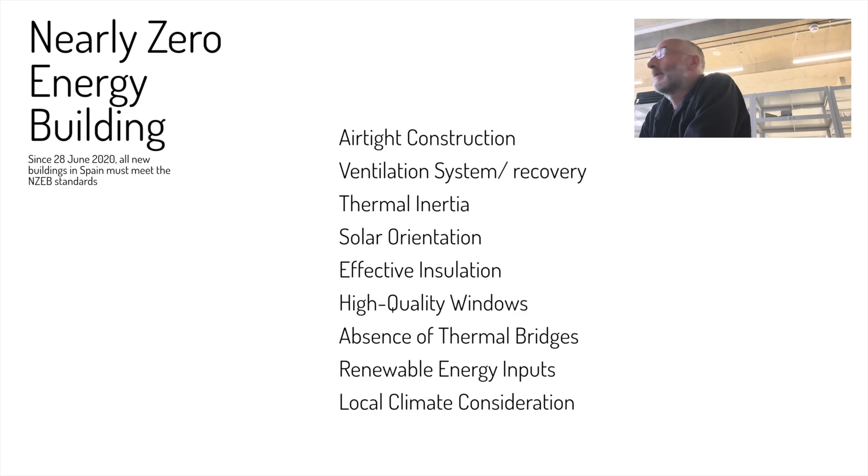So add to that, because of the climate crisis, because of the European Union membership, buildings in Spain since June 2020 have to be nearly zero energy buildings. This is broadly like the German passive house standard. We're talking about, I'll read them out: airtight construction, mechanical heat ventilation recovery, high levels of thermal inertia - we'll come to that - solar orientation, the opposite of ours where they don't want the sun, effective insulation, high quality windows, absence of thermal bridges, renewable energy inputs, local climate consideration.

If we look at Mallorca, this is the Spanish regulations. My red pointer doesn't work because it's a TV, but you can see London on the end there. Mallorca's broadly the same as Valencia. It's a category B climate, so these are the regulations for thermal conductivity and so on.

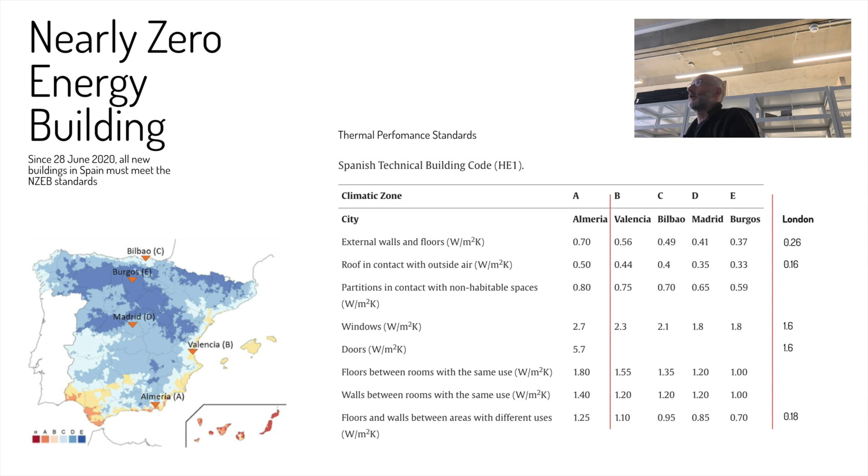But the regulations are probably sensible for the climate that they have there. And into this comes IBAVI, the Balearic Social Housing Institute, styled IBAVI, which has been building and operating low-cost housing in the Balearic Islands since 1986. Around 1,800 rental apartments already exist, and 900 more are now being built.

For most of its buildings, IBAVI commissions independent architectural firms such as H Arquitectes, TEd'A, Peris and Toral, Data AE, López Rivera. And IBAVI's in-house architectural team also design buildings. In all these cases, they pay full fees. IBAVI's projects begin with a technique of resource mapping, which allows them to discover all available local resources, whether tangible or not.

They're also the only social housing provider, apart from perhaps the likes of Camden architects and LCC architects, that gets an El Croquis about them - issue 219. They benefited from applying for and successfully winning a European grant to do research into sustainability. It's not normally given to housing projects, but they managed to make this proposal for the Life Reusing Posidonia project.

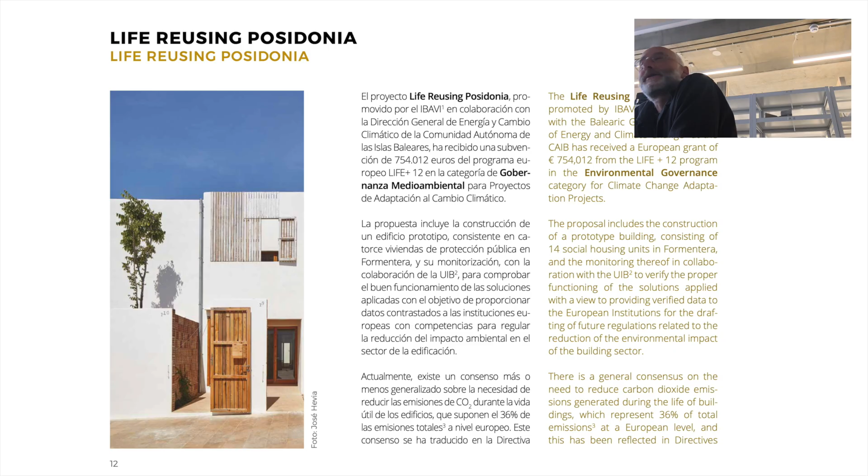They got 754,000 euros from the LIFE programme, and used it to build 14 social housing units on Formentera. They developed this catalogue of research, a 144-page document. I've just selected a few pages to give you an idea, but it's downloadable from a website.

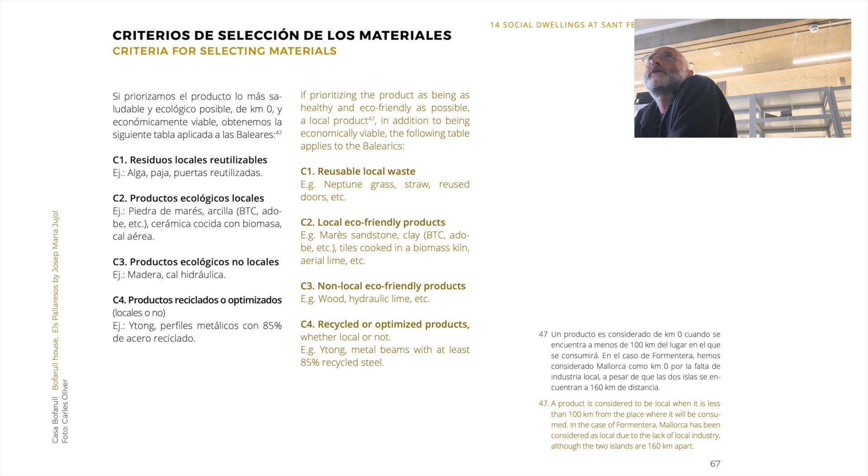Category C2s are local eco-friendly materials. That's the best - there's no transport costs, and the materials are doing their job. They considered local to be within 100 kilometres, but because Formentera is a small island quite far into the Mediterranean, they allowed Mallorca to count as local for them.

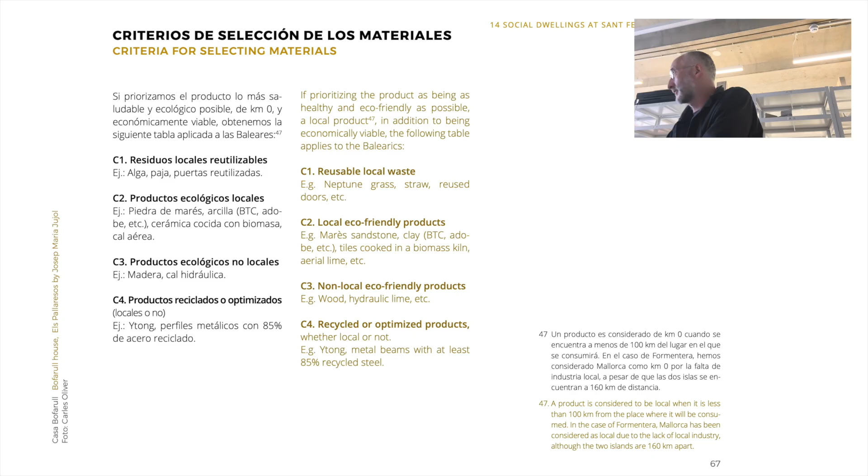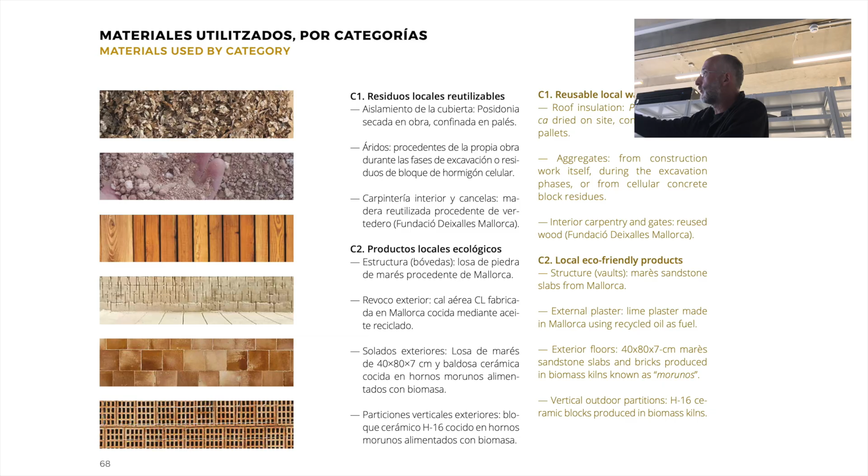The best things are reusable local waste - we'll come on to that - and eco-friendly products. We're moving away from what we want to what we have to have, for non-local eco-friendly products, and then recycled and optimized products. At this point, the Ytong cellular concrete blocks are an example.

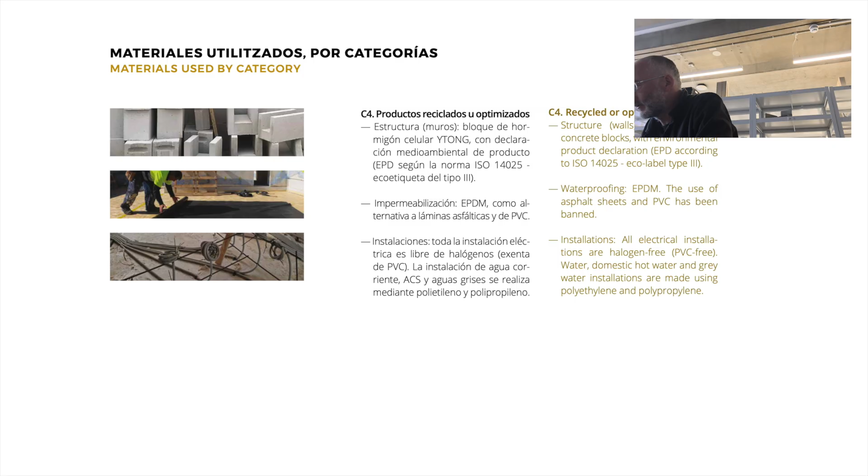The key thing about the IBAVI approach is not just to build social housing - these cannot be sold, there's no right to buy. No one can take these off the state. They're owned by the state.

If you have enough salary to rent somewhere, you can go and rent somewhere. These are for people who need these spaces and would otherwise not have accommodation - they'd have to live in small rooms with their parents, or pay an extortionate market rate because they're competing with the Germans who own all the property on Mallorca.

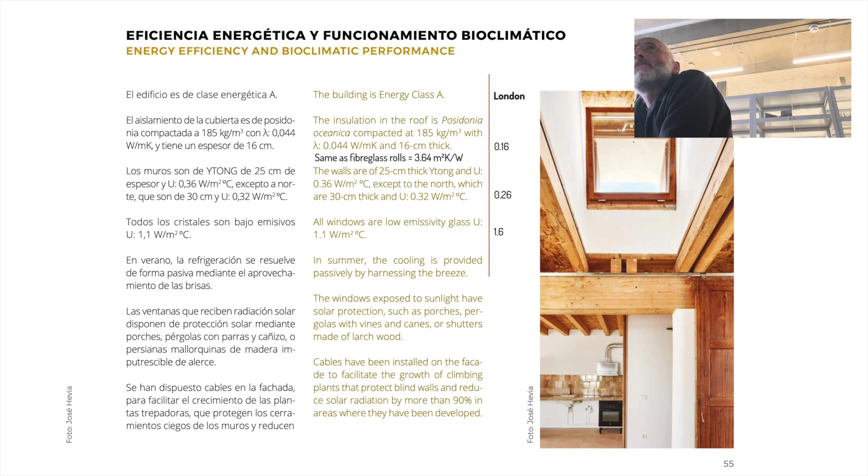And the thing that they've done is they've gone back and measured. They know the data, and they know what does work and what doesn't work in their theory.

Take one of these materials, Posidonia oceanica, or Neptune grass. This is an undersea saltwater plant which washes up when dead on beaches like this. Due to its chemical composition and content of phenolic compounds, sulfides and sulfites, there's no terrestrial predator that can destroy it - no fungus, mushrooms, termites, nothing.

So it's there, it's ugly, the tourists don't want it on the beach. So what they do is gather it up, dry it, and use it as roof insulation. And it's not limited to Mallorca - here's a map of the Mediterranean, and in blue are the places where Posidonia washes up on the beaches.

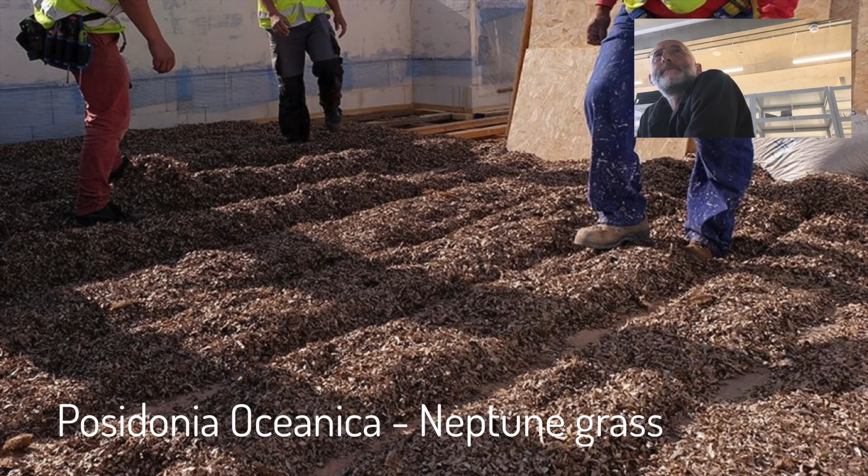Here they are installing it. It's been sun-dried, and then there's a timber frame, and the guys on site are hand-tamping it down to form the insulation. As I said before, thermal capacity is broadly similar to fiberglass mat, which is pretty good.

Another material, Mares - now you've probably seen this before. This is a seafront quarry of this sandstone, which is about 50% of the underlying geology of Mallorca.

Then another local sandstone, Santanyí, with a tighter texture, used for slightly waterproof surfaces like kitchen worktops and some interior walls. The main roof construction is vaulted tiles, again locally made, and all woodwork is Madeira Norte, Mallorcan pine. IBAVI described this building as their university.

There isn't an architecture school on Mallorca, but they do have this Jornotsen house. I was lucky enough to arrange a student field trip to see the works of IBAVI and try to understand their ways of working. The guy in the hat - I think because he's thin of hair - is Carlos, the chief architect, main researcher, and a very persuasive speaker on this subject.

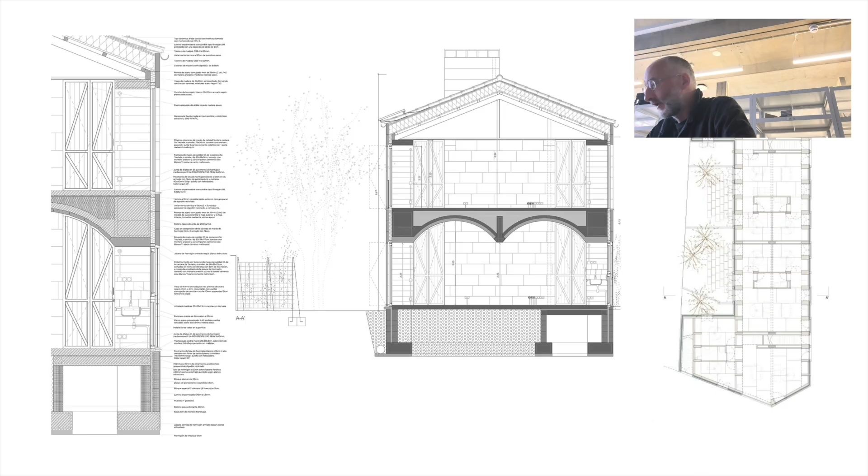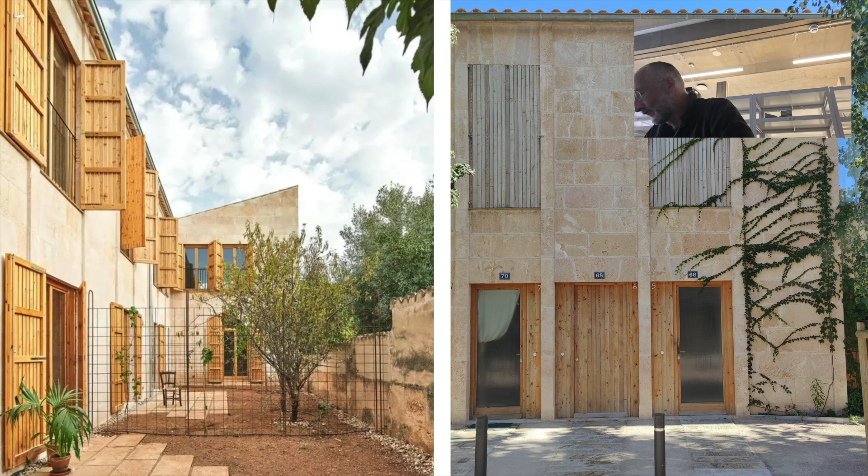The solar shading, we're not really allowed to do this here, but the solar shading is vegetation, and they use reclaimed timber for the shutters. The idea is that in the Mediterranean communal spaces, you sit outside in a summer's evening on a rocking chair and talk to people rather than inside sweating.

We went around the site, and not in this but in the one next door, which I'm about to come to, I saw an air conditioning unit, and Carlos told me that they're not allowed air conditioning units, and their contract can be terminated for having them, so he'd sort that out.

They went on and built the 19 dwelling unit alongside. The railway line's at the top, the very small main road at the middle, and then the kind of small space—you can't call it a town square—but it has that kind of function between the buildings.

Unlike the 8 metre span of the first phase, there's a 13.5 metre depth here. The floors therefore span from the party wall to the party wall. You can see the walls going across the plan, so they're short span timber floors between them. That frees up the facade to be just solar shading.

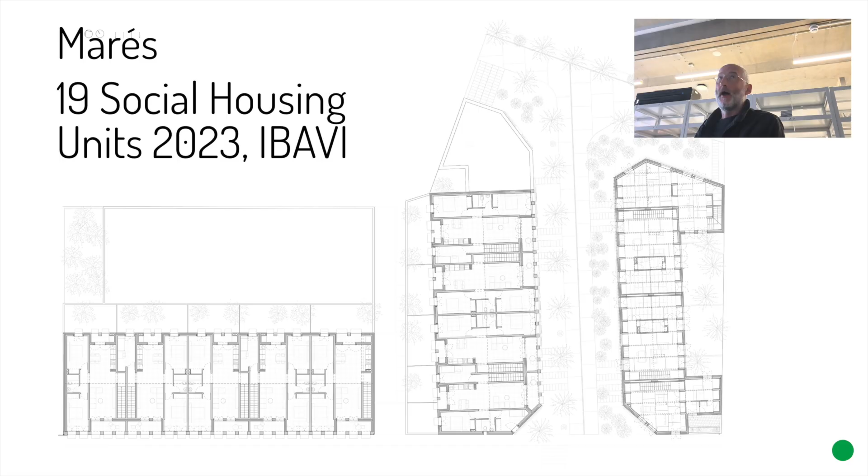They use a sloping roof system based on the Menorcan system. On the right, they use the Majorcan system because the massive weight sits on the walls and that pins down the thrust of the arches on the ground floor. Here they use the Menorcan system, which comes from Catalonia and is much thinner. That's where I found the air conditioning unit, by the way.

There at the end, the apparent chimney, their ventilation extracts, and you can see the building in a very tight street achieves its solar shading through a deep facade. The details are what they are. They don't need to hide the fact it's roof tiles, they rather celebrate the fact it's roof tiles.

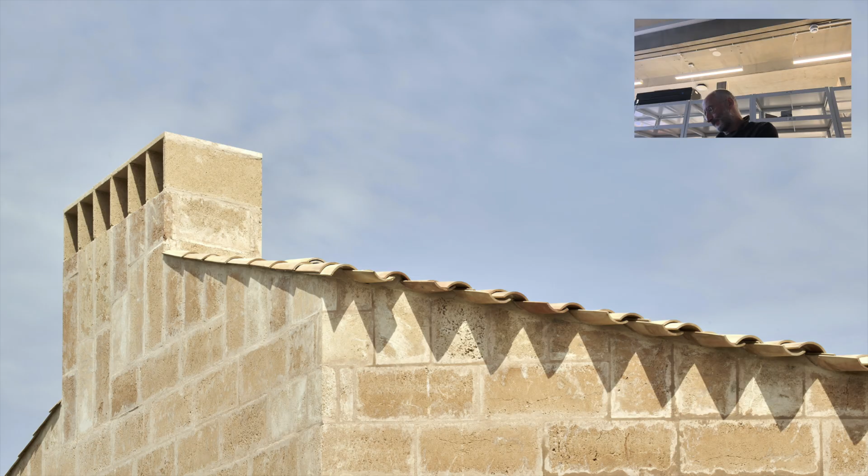This is a photo montage because the street's a bit narrow, so they use the pin cushioning. But there you can see that the open spaces have external and internal spaces and allow a variety of uses and dwellings between them. Here's the elevation.

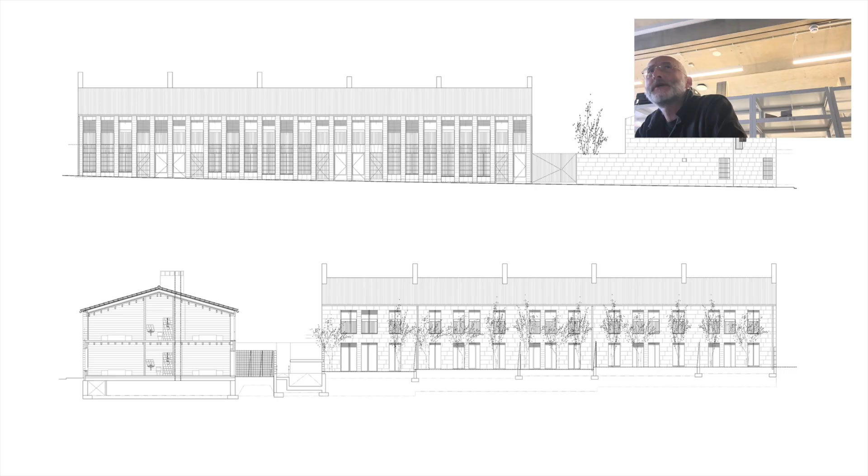At the back, it actually has a car park, and that's similar to a lot of other IBAVI projects because the local government regulations require they have parking, but no one actually gets a parking place, no one parks there, and the intention is to use it for a social function in the future or to build on it.

There's the details, as you can see, thinner construction than the first phase of the development, but obviously thick because of the slight inefficiency in insulation.

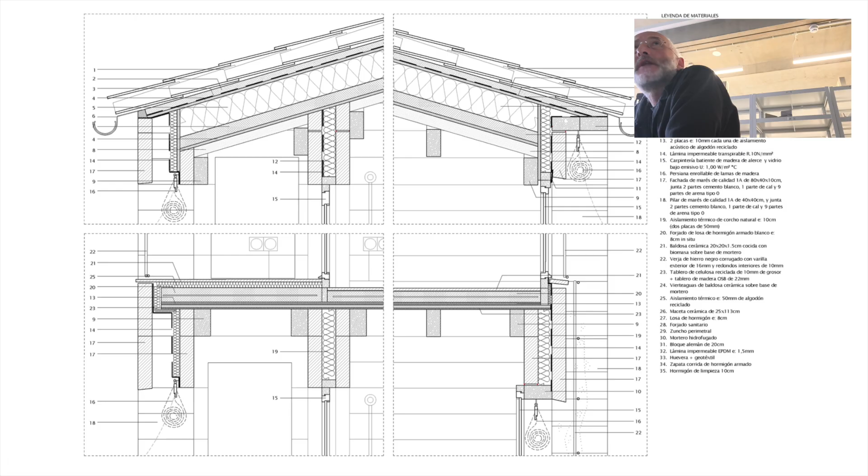Here on two other IBAVI projects, you can see the way that they're developing a consistent language of materials. They say we don't want to learn every new material. Once we've found something that's right, we want to stick with it.

The joinery liner is local pine, largely reused from reclaimed buildings. I asked why they use rebar for the balcony guardings. Apparently, it's better quality than the standard steel. It's pre-rusted, and it gives a grip for the solar shading to hang on, or you dry your clothes on for natural ventilation.

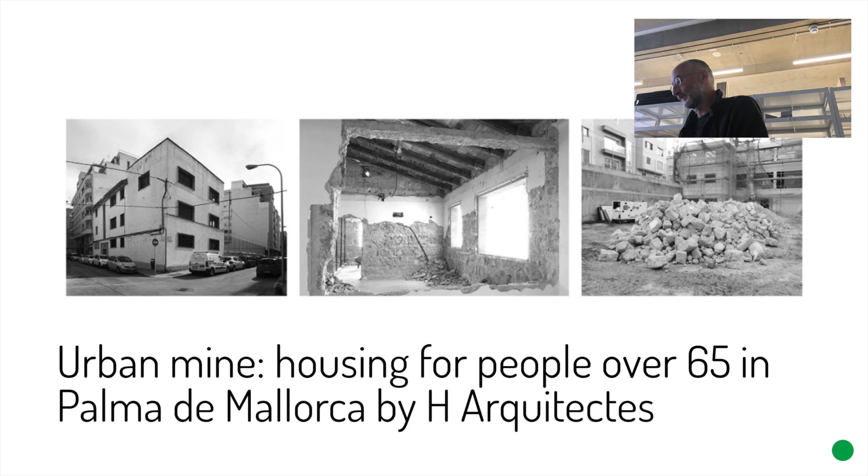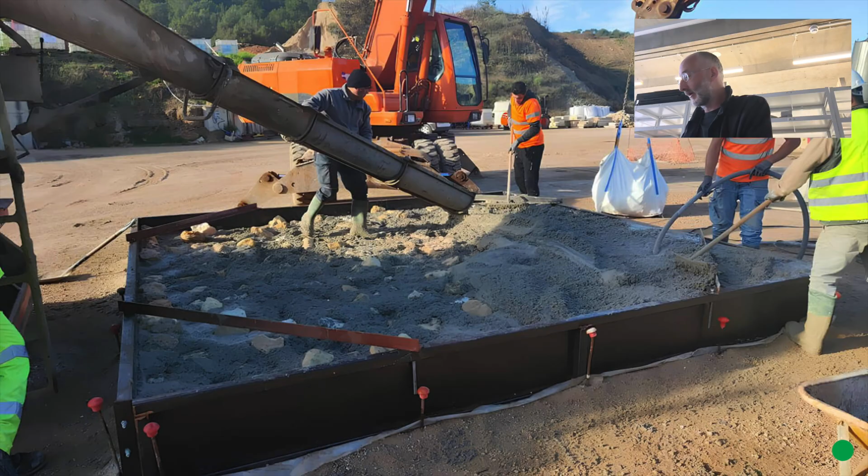Second, all the sandstone, about 160 cubic metres, was used to construct large blocks of cyclopean concrete with cement and lime mixed with recycled Marès stone, 40% of the block volume, composed of large cobbles up to 30 centimetres diameter, sandstone gravel, and Picadís sand, which is also made from the Marès local sandstone.

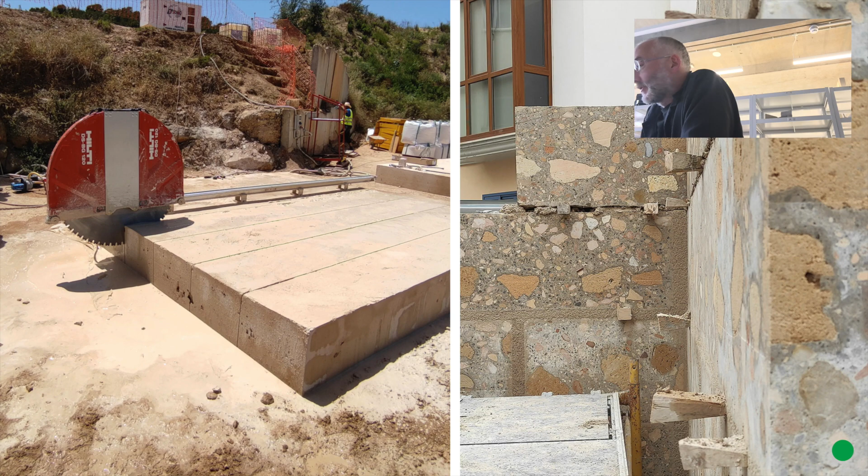Each block was cut with a large disc saw from a 4 by 4 metre slab, and the stones reappeared on the faces of the blocks. So they took the materials to a quarry and used the quarry system. There's a diesel generator that powers that saw, but that's it. That's the quarry, that's it.

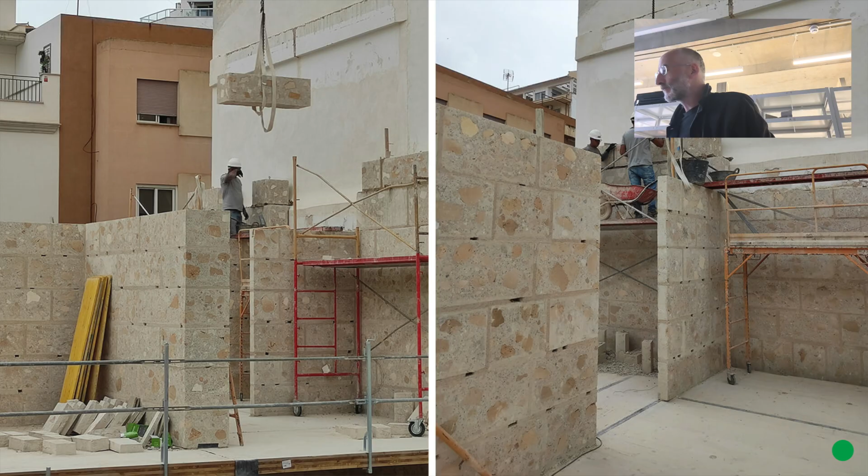Instead of making 3,000 different formers to make the blocks, they cut them into standard sizes and then subcut them to make all the walls in the project. The blocks of the top floor, being less load-bearing, are made of 100% lime concrete, while the rest of the floors combine lime with cement.

These blocks, approximately 135 centimetres long, 42 centimetres high, with variable widths for each floor—65, 54, 44 and 34 centimetres—were prefabricated once the demolition was completed, before commencing construction of the new building. This approach significantly reduced the construction duration.

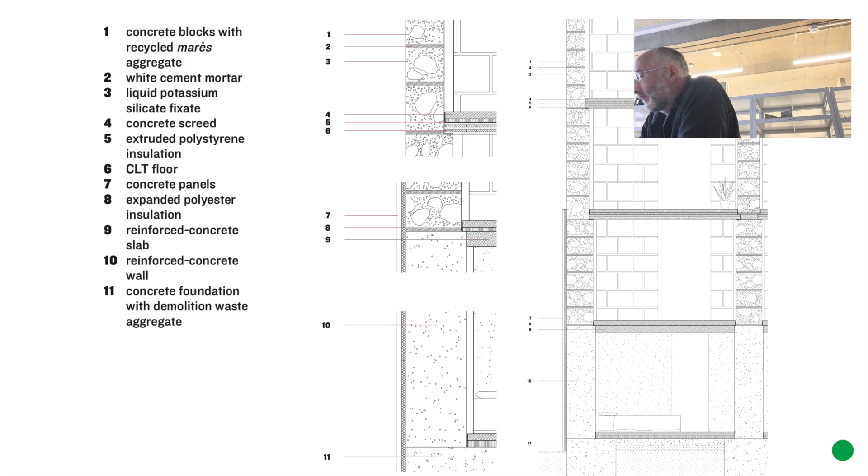The blocks were stacked to build load-bearing walls perpendicular to the street, supporting cross-laminated timber ceilings. On each floor, the walls reduce in thickness by 10 centimetres, allowing direct support of the timber floor panels, facilitating the speed of execution of the entire structure.

These are the main walls coming into the plan, shown on the top in heavy black. Perpendicular to the main walls are 13 centimetre thick partition walls, constructed with the same cyclopean concrete, resulting from cutting a 60 centimetre wide block into four 13 centimetre sections. The structure of the entire building is bound together to the stair core and the elevator.

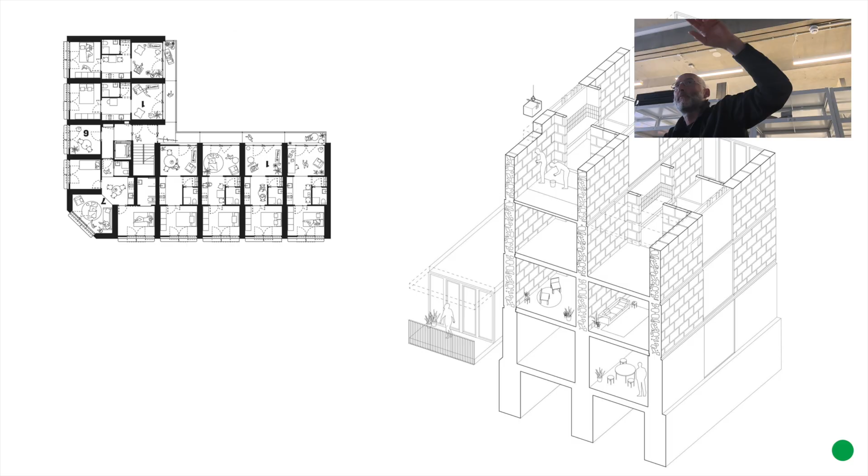The spatial organisation of the building responds to the structural system. The floor plan is organised with the stair core on the corner, providing access to a walkway in the interior garden, from where each apartment is accessed. All are through-apartments except those on the semi-basement floor, which, like those on the attic floor, have half the depth of the typical floors and utilise two structural spans for each apartment. So the mid-floor apartments run front to back, the basement apartments face just the courtyard, and the top floor apartments are inset.

Each floor also has a communal area—laundry or lounge, etc.—on the corner. The facade starkly displays the structural system: the vertical end walls of the prefabricated blocks, which decrease in thickness on each floor and support the timber floors. You can see they've also followed the same material approach on the interior.

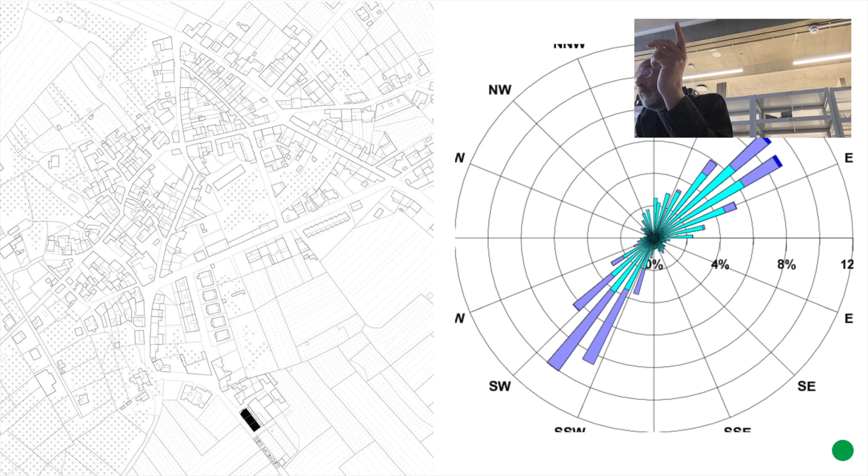Here you can see the wind rose from Palma Airport, and the orientation of the building. On the map it's the black one, and you can see the orientation is very much so that the breezes will go across the plan. This embat wind is very consistent.

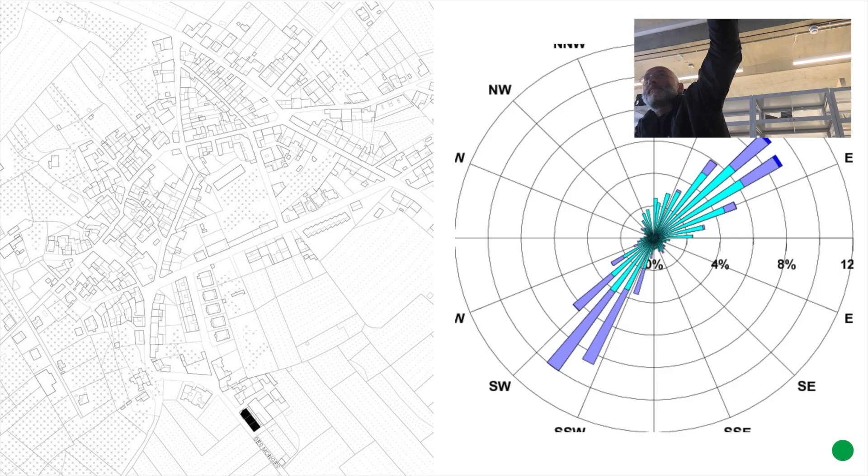It blows from the sea to the land, and from the land to the sea, because of the thermal issues of the Mediterranean and the land heating up in the sun. And they didn't just trust to luck, they did computational models and so on.

I don't have a very good slide, a blurry screen grab, so I won't show you that. You'll also notice that the building is on the very south of the village, and for planning regulations they can't build any further south, and that led to an interesting thing.

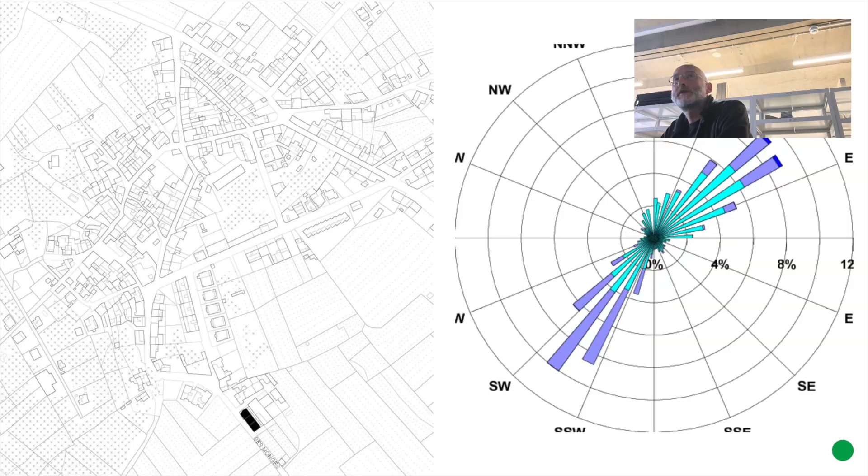They have a trombe wall on the south, so in the winter a small cavity heats up, gets pretty hot, like 90 degrees centigrade in the sun, and then it goes through what's effectively a drain pipe to cupboards in the kitchens, which have the mechanical heat ventilation system.

All that happens is a man turns up in April and turns that handle round, and he comes back in October and turns it the other way. And that's the technology. That's the technology.

There's a stack system of stones that stops that splaying out, and on top of it, the lightest weight of roof possible, which means a flat roof would cost money and the walls would have to hold it up. They have a sloping roof with insulation and tiles, because they want to give the most they can to the most number of people with the least amount of wastage.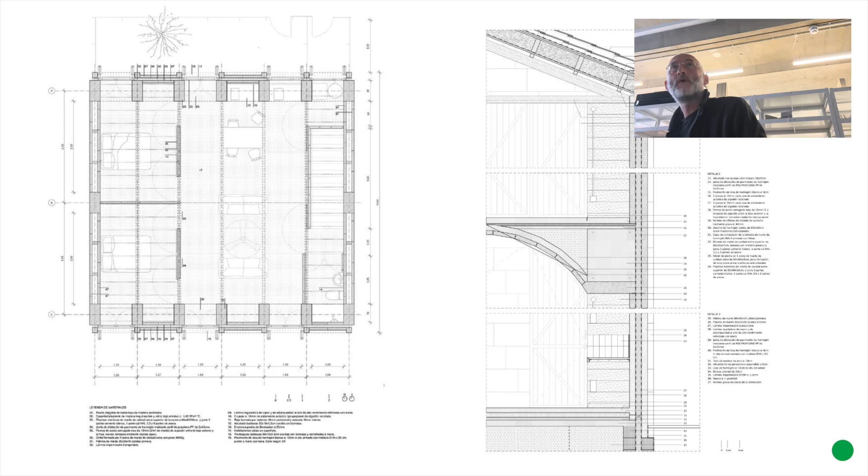It's built out of the materials of an old garage that were on the site, where they repaired cars. The plinth is entirely from that stone, the rest is reused, and it has a communal courtyard, which is shaded, gets a bit of evening sun, but otherwise is shaded.

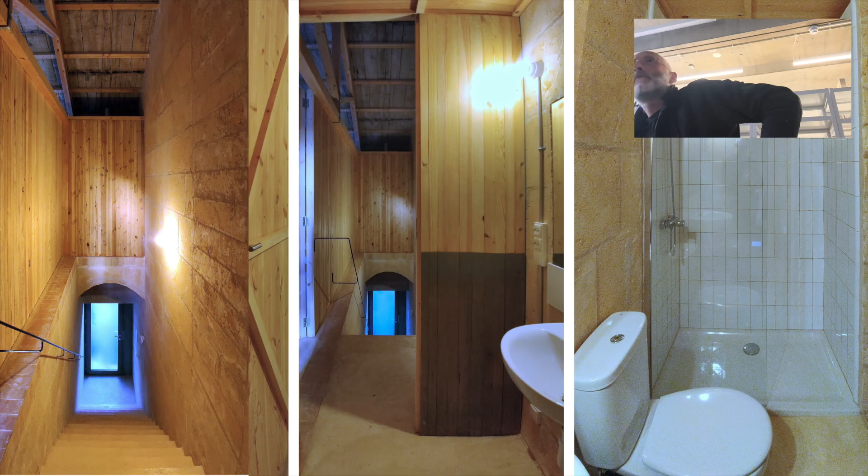We were fortunate enough to be taken inside, because the middle one's not yet occupied, one of the 3 middle ones. So this is the view from the first floor, looking down, looking up, and then you see, for example, the bathroom. They only tile the shower because that's the place where it gets wet.

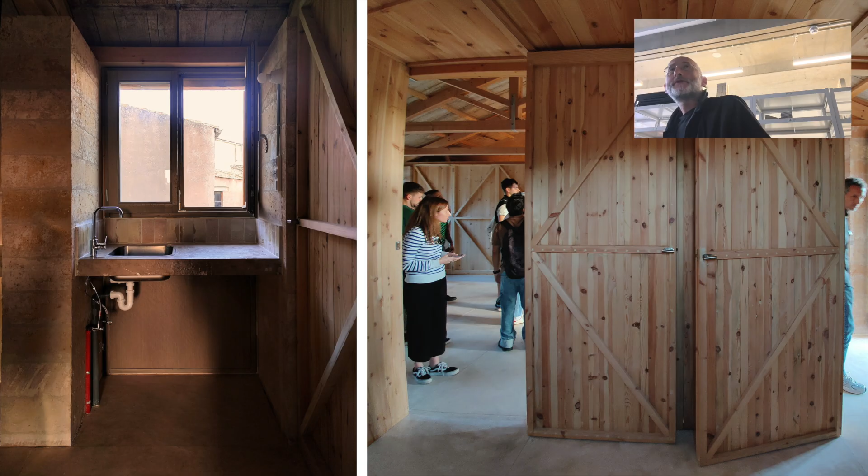There's no point tiling anywhere else, the screeded floor's fine. And this is a view on the right, I'm inside one of the bedroom units. It's got a flat ceiling, so you can put your storage on top.

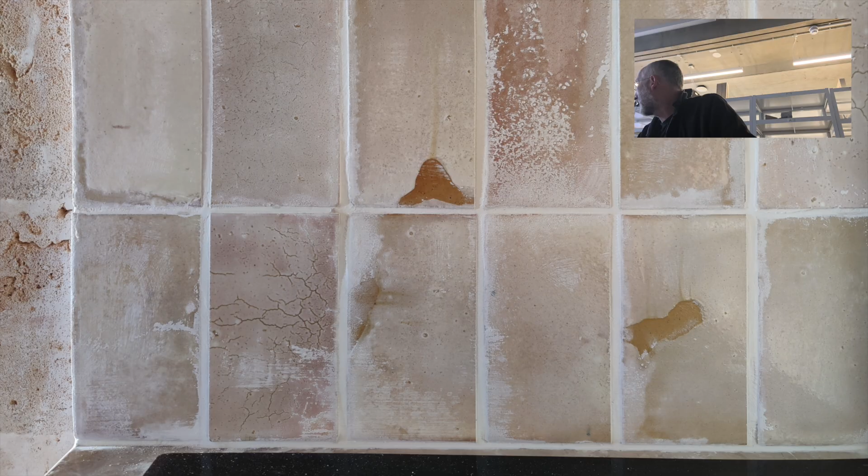On the left there's a kitchen, and you'll see the kitchen is very, very basic. It is that and that. So there's some very nice tiles, some reclaimed, some locally made. That's an induction hob, that's the stone bench. This is the small, more marble-like stone from the island, and that's all you get.

And the reason it's all you get is because every time the tenant changed, they had to spend €3,000 stripping out the kitchen, which was made out of melamine-faced chipboard, putting it in a skip, and then getting another melamine-faced chipboard and putting it in for the next tenants.

So here, you just get a slab and you put your fridge underneath it, or your washing machine. Bear in mind you don't need a tumble dryer because everything just dries hanging over the balcony. If you've got a big fridge freezer, it can go in with a boiler, which is where the mechanical heat ventilation recovery is.

And there's an idea that these have a quality, so they don't want the buildings to last for 25 years, they want them to last for 100 years or more. You don't know what use they'll be. You can take all the pine out. There's no kind of hierarchy of rooms in there.

You won't see sockets. That's because the conduit is cast in the floor slab and they chase just the bottom 150 mil out of the mortar, put the cable in and then just cement over it. That's the detail, surface mounted socket otherwise.

And there you can see my students in the space with Carlos explaining to us about how you cannot copy what they do.

He does not suggest for a moment that you build an IBAVI building in London. He says, where are you from? And different people in the group are from different places. Someone's from Brazil, so what did they build in Brazil with before the Industrial Revolution? Turns out it wasn't timber, because they have a lot of insects that just eat through the buildings. And he went round and got the same answer from everybody.

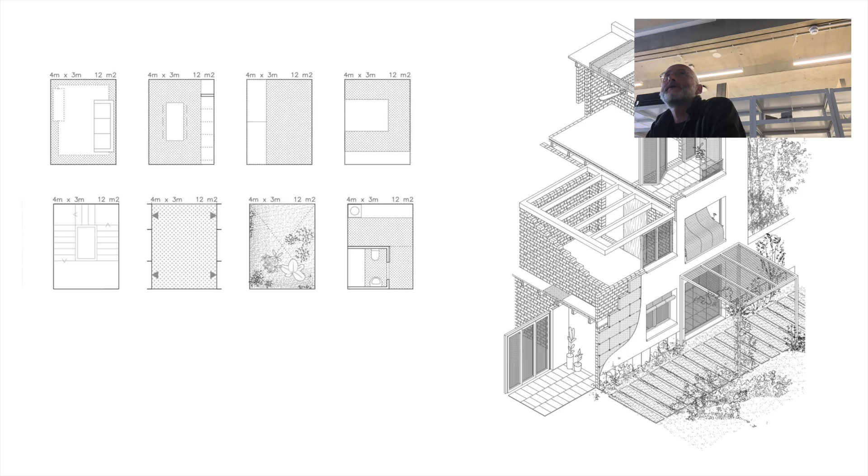So every room in the plan is democratic. They're all 12 metres squared, 4 metres by 3 metres. Peris and Toral think you can pretty much get anything in there, whether that's a staircase, a bathroom, or an external space to dry your clothes. That leads to this sort of stripy plan.

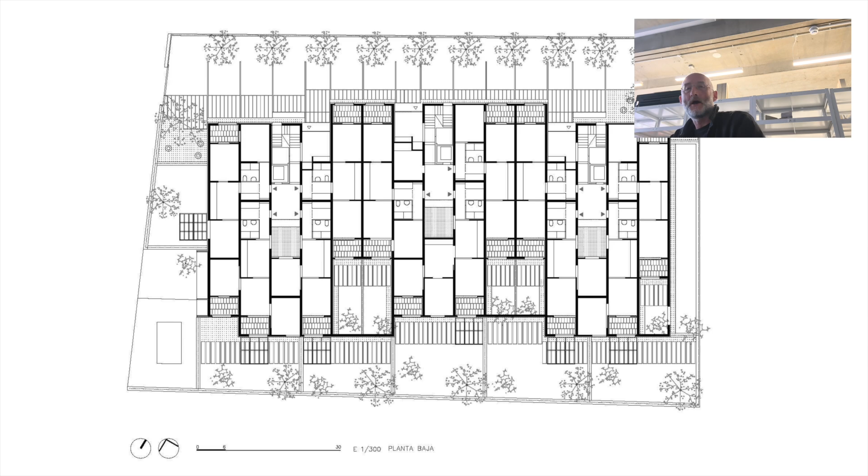That might seem a bit mad, but it means that their structural system, which is clay earth blocks and thin concrete beams, can work because they're all a 3 metre span. And the regularity means it's easier for the builder to understand and construct - no complex ideas of this, that and the other. As the hierarchy of spaces is an equality of spaces.

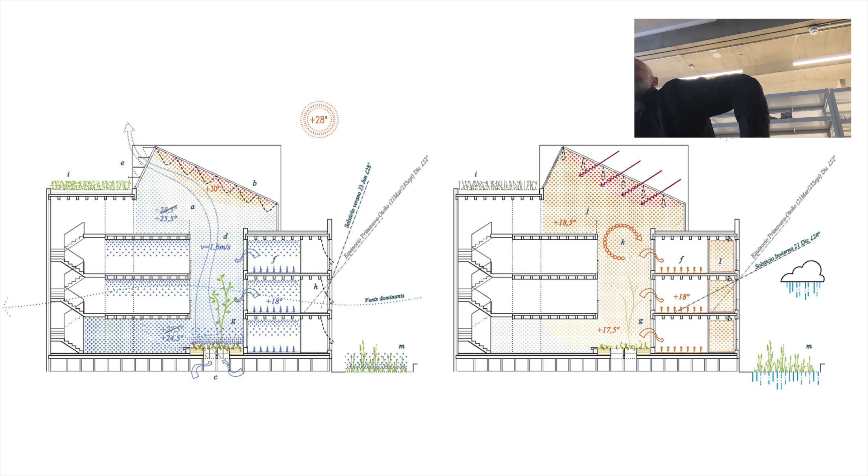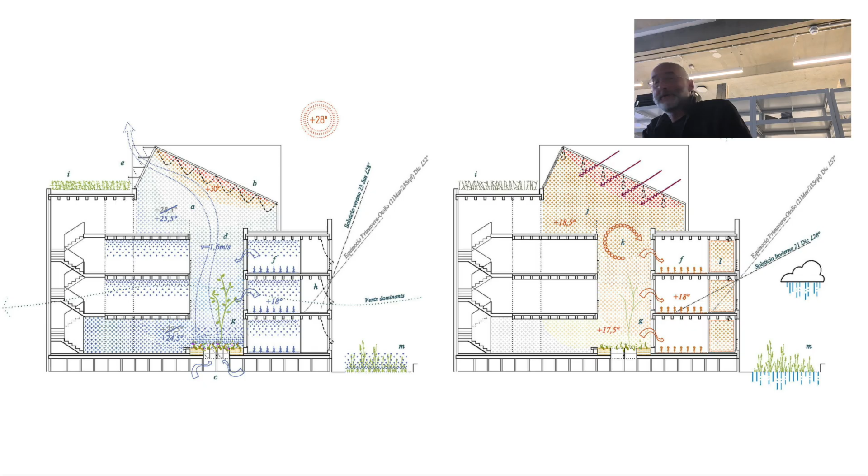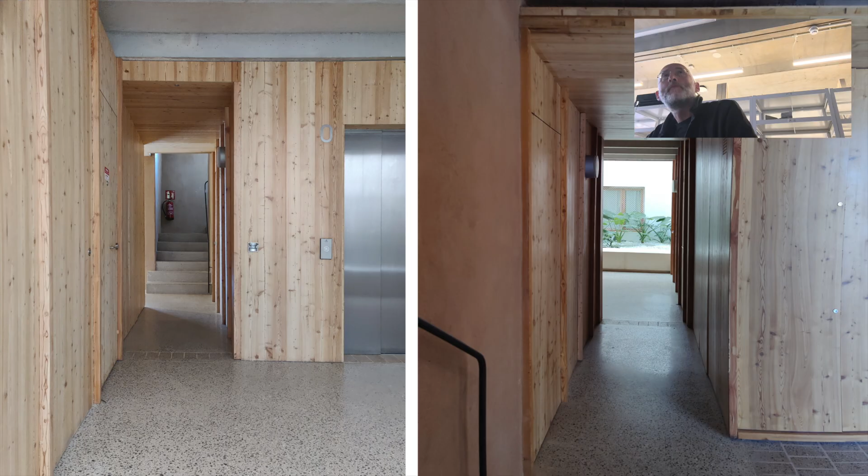The way that works is our clay blocks are covered with cork insulation and some glass block insulation. The bottom has got marble on, so we don't get damage. The solid wood door sets are married with ventilated grills, made out of local clay tiles. That means the air can be drawn in through the common parts, which are made of CLT block, wood, clay walls - the handrail there is just a piece of steel.

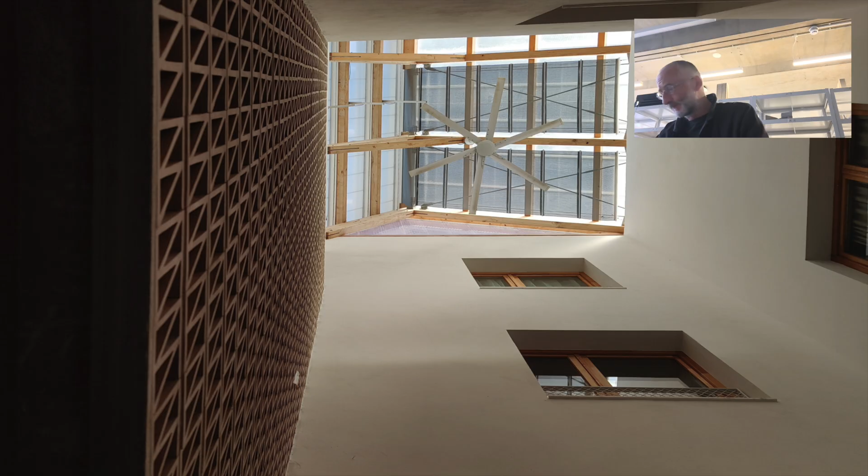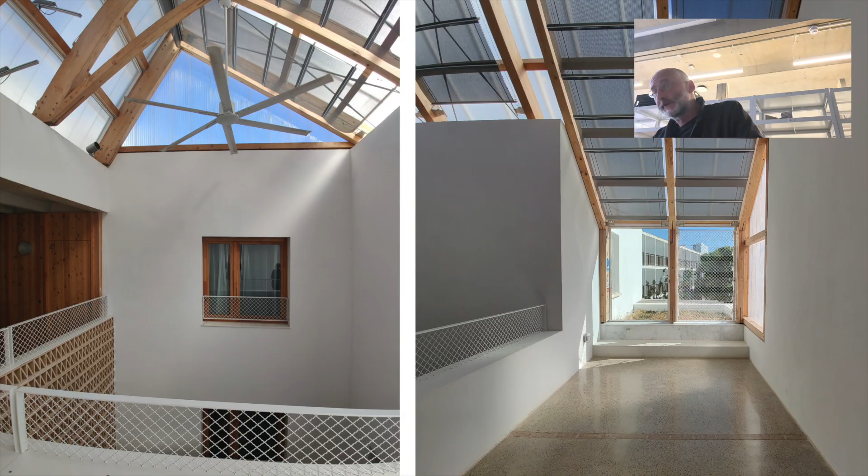And they're drawn up and out into this high space, and rooms - kind of less significant rooms - ventilate into that space. This is in winter, because it was taken in the winter. The blinds, which are automatic, are down, the fan's not turning, and the vents are closed.

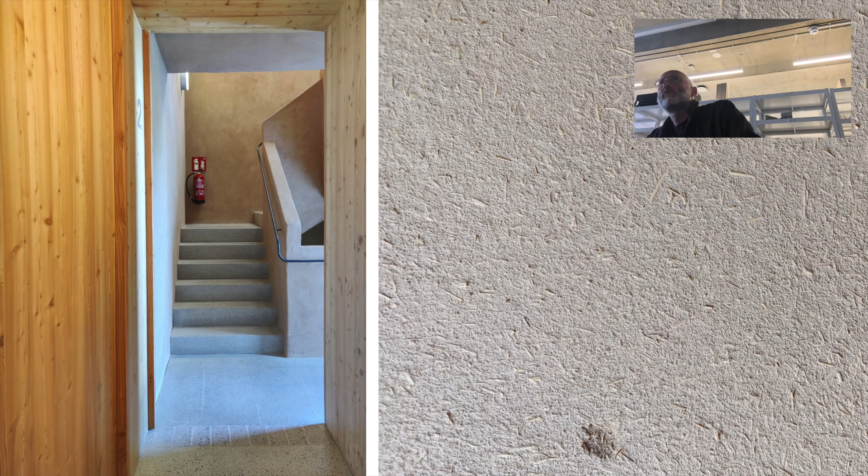And here, an external drying courtyard where you can go and hang your laundry without it being all over the facade of the building. And this is a view of the top of the stairs with the lime plaster - it's all breathable lime plaster on the right, which is how the stairs are finished on the verticals.

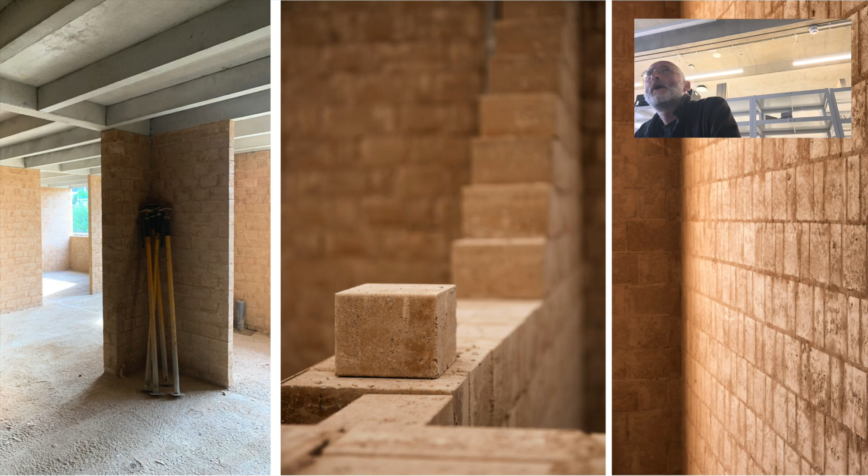And this is it under construction, and you can see the rather elegant beauty of the clay block - nothing to it, no reinforcement - and the simple grid of concrete that does the floor structure and sits load bearing onto the fitted terra block.

There's the odd concrete column, but basically it is the structural system for a building of that many floors. And then just around the corner, 24 public housing units - that's not the postcode, that's the name of the architect. They're called 08014.

If anyone speaks Spanish, you could say it. No. Ocho, whatever. Anyway, they're very nice and very hard-thinking architects.

And they built this building using, at the time they built it, extruded terracotta blocks that were made in Mallorca, but the factory has since closed. The previous architect - what was the name? The previous one? Peris and Toral. Peris and Toral.

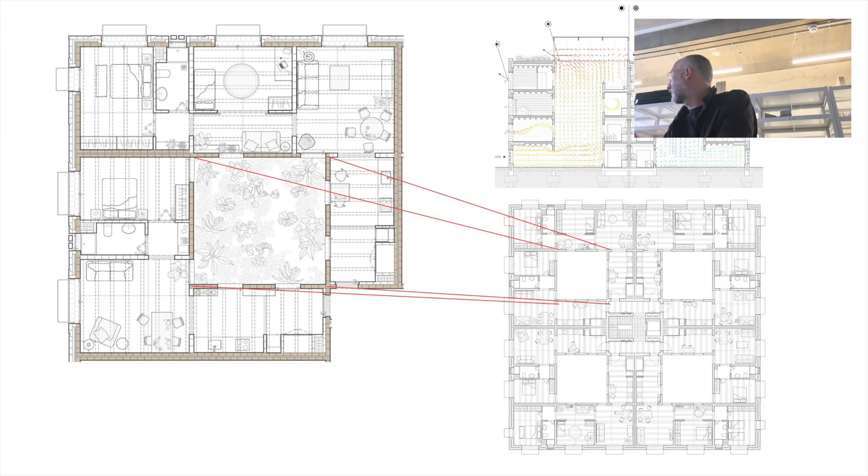So here we see a building with some expression. It's 4 courtyards. You could just see in the previous slide that the courtyards have got greenhouses on top of them, and wrapped around each courtyard's typically 2 apartments.

You can see in the plans, which I can't really see but hopefully you can, that you come in through, for example, a kitchen to a living room. There's corridor spaces which offer pleasant relief from the heat at certain times of the day, and then you come to bedrooms and so on. You'll see the bathrooms are on the facade, which means they're naturally ventilated, so the moisture can be drawn outside locally rather than racked up through the building.

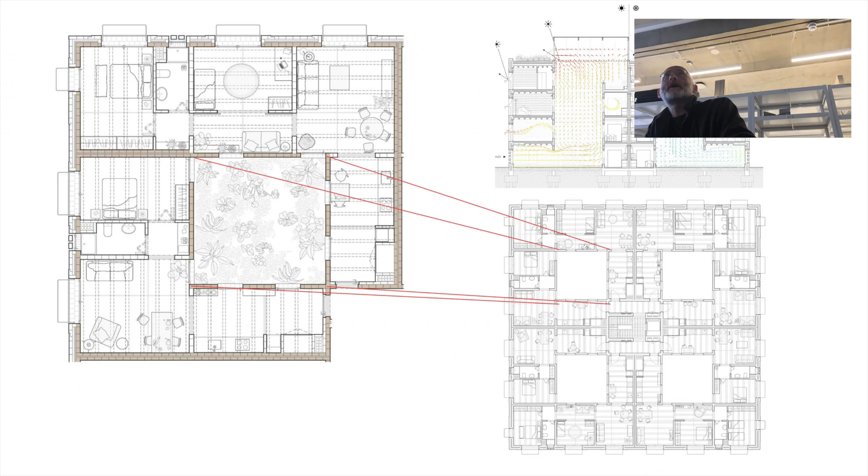And you see on the top right the same idea of the ventilated atrium in its summer and winter conditions.

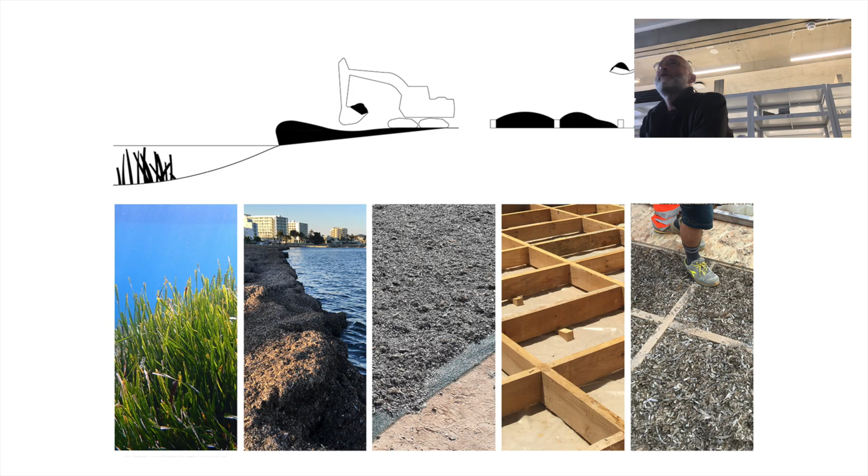This project also uses the Posidonia, which is the seagrass. It's brought out, and it's only harvested at certain times of the year because it protects the dune slack, but the tourists don't like it, so they're very glad to get rid of it, and it keeps on turning up. It's an almost limitless supply of insulation material. That's put out to dry in the sun. It's a one-man factory - a sheet of plastic and a man doing this - and then it's gathered up into the sort of bags you carry things around at IKEA and dropped off into this grid of local timber.

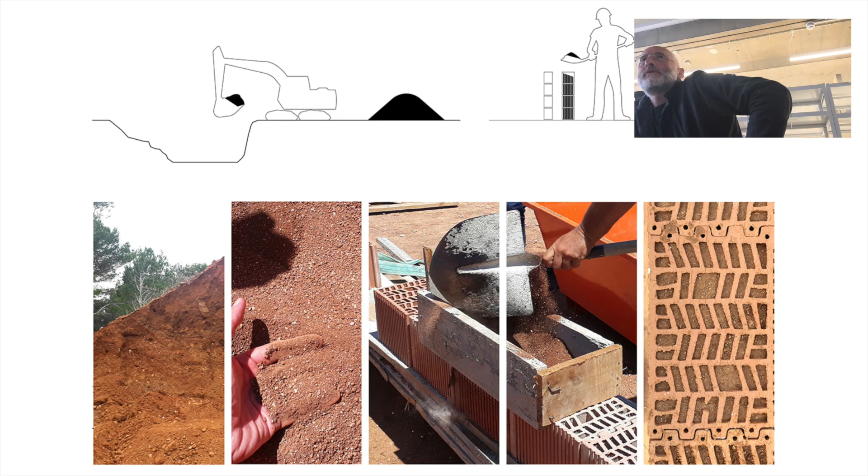And then, interestingly, this block, they've used terracotta blocks. They come in a number of sizes, not many, and they're extruding enough holes in them. But to increase the thermal mass, they fill the holes with the sand that they excavated from the site.

There was no way they could meet the thermal criteria without insulating the outside of the building, and no way they could meet the sound requirements without adding deadening plasterboards inside. But by persuading the contractor to tamp the admittedly very dry sand into the blocks, they've achieved the outside of the building being terracotta block and the inside of the building being terracotta block. Useful for us in our colder climate, they've also incorporated a layer of insulation in the cavity.

So the outside is acting in some way as a rain screen, and the inside is acting with thermal inertia enclosed within the block. The insulation is cotton recycled bats, which have a fungicide in them. And they've got a very thin layer over the top that seals the joints, makes them airtight and deals with permeability, air and moisture.

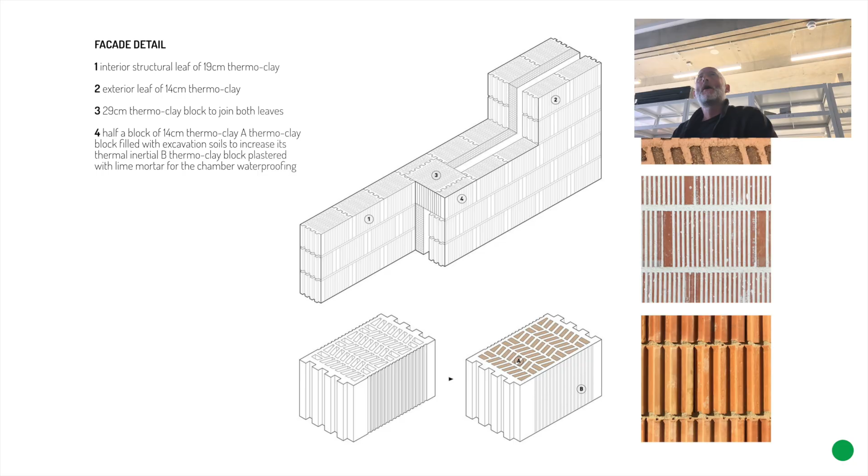Here it is - it's opposite the most disgusting array of hotels that you could possibly imagine, and it sits there as a sort of jewel in this sea of detritus.

And then you can see the same usual IBAVI details of the most basic solar shade. The reason it sticks out is so the sunblind can hang out on it but the air can go up underneath, and the atrium can then draw the air through the building, taking the heat with it and bringing in fresh air from outside, which is of course cooler than the air that's built up inside. And mechanical extract at the top, you can see there.

And there it is on the street facade. The blocks that face us don't have fill, so they come out red. The blocks that are sideways to us do have fill, so they come out white. You can see the bathroom vent at the top, and reused timber where possible.

There's a nice person who was an immigrant and is very happy with his dwelling, and happily left the door open for us so we could go inside - unlike the local chap who shouted at me for making a noise.

On the right you can see an open courtyard. The roots of the plants go down into the soil, so they wick up water. Post boxes, nothing more than they need to be. There's a student hiding behind a column. This is that central space - it's a very wide photo, but you get the idea.

And then this is a typical flat, in this case a ground floor flat. We saw the plans of the dwelling wrapping around the central courtyard, but with less private rooms.

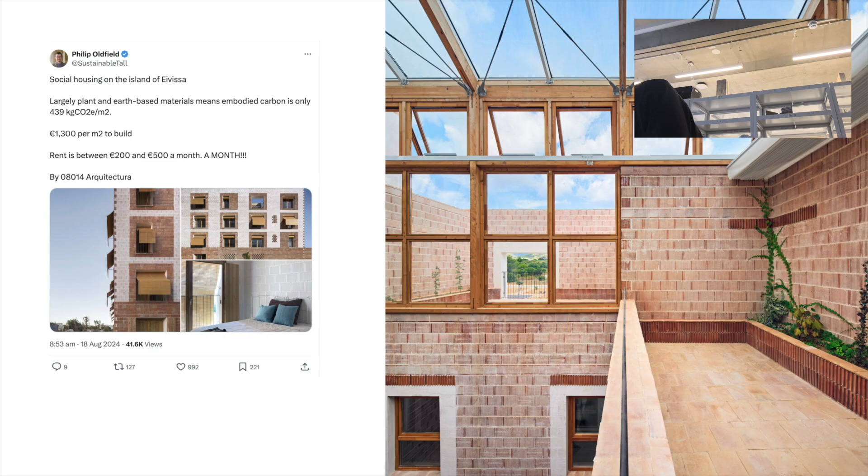And there to finish, I wish I could read it - whoever wrote this thought it was an island, but Eivissa is actually just a bit of Ibiza. Social housing on the bit of Ibiza called Eivissa. And then he says largely plant and earth-based materials means embodied carbon is only - he gives a number which is very good - and then he gives a construction cost that's unbelievably cheap. And then he says rent is between... 500 euros a month, exclamation mark, exclamation mark.